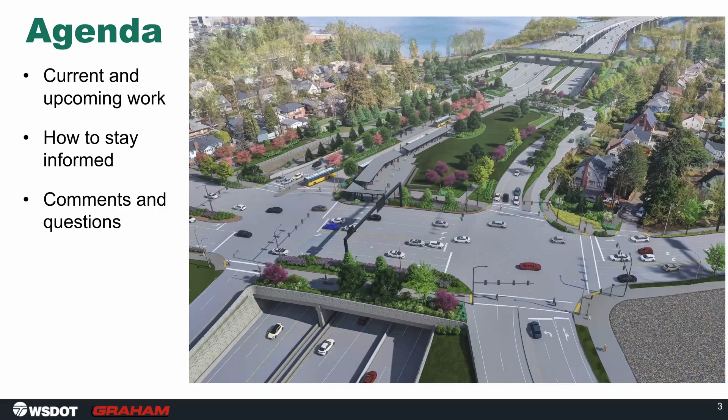So as many of you know, the Montlake Project is made up of three major components. One was the new eastbound bridge. The second being the Montlake Lid, which includes the HOV and bus lane improvements, and then the on and off ramp. And then we also have the bicycle and pedestrian bridge, which connects the north and south pathways.

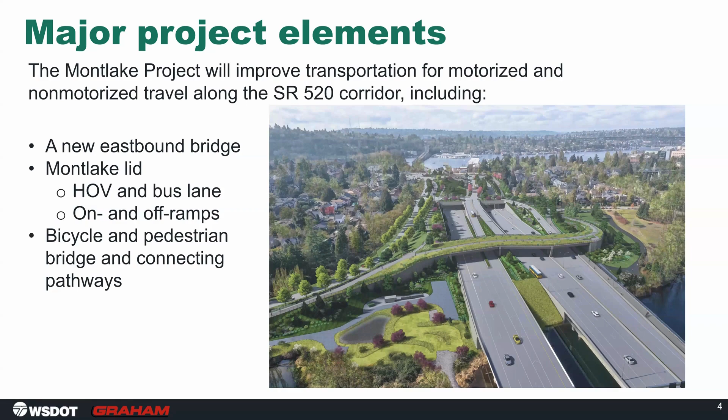So back on September 16th, we opened up the HOV ramp and the new HOV lanes across the lid structure. In the left-hand picture, you can see an image of what that HOV ramp looks like for those who have not had the pleasure of traveling on it yet. So that heads both east and west onto 520. Sorry, let me clarify that. It is for traffic heading west off of getting onto Montlake and Lake Washington, westbound 520, and then it gets you back onto eastbound 520.

In the right-hand photo, you can see an image of how that intersection works at the top of the ramp. So Ryan, if you can follow me around that to clarify with the pointer. When you're coming westbound on 520 and you get up onto the top of the lid structure, you can use the HOV ramp, which Ryan is highlighting there for 3+ riders or bus traffic will be using that. The other alternate route is for you to take the off ramp, which is the white line there, and that will both intersect at the stop sign intersection on the top of the Montlake Lid.

So HOV traffic can carry straight through that intersection into the transit center area and the Montlake Lid area. And then the white traffic, general purpose, can carry through that intersection to Lake Washington Boulevard, heading east or west on Lake Washington. Then for traffic moving on eastbound Lake Washington Boulevard, they can utilize the HOV lanes with 3+ passengers going eastbound on Lake Washington Boulevard and then turning onto the ramp. They can also utilize it coming from southbound Montlake across the lid and getting onto the ramp there as well.

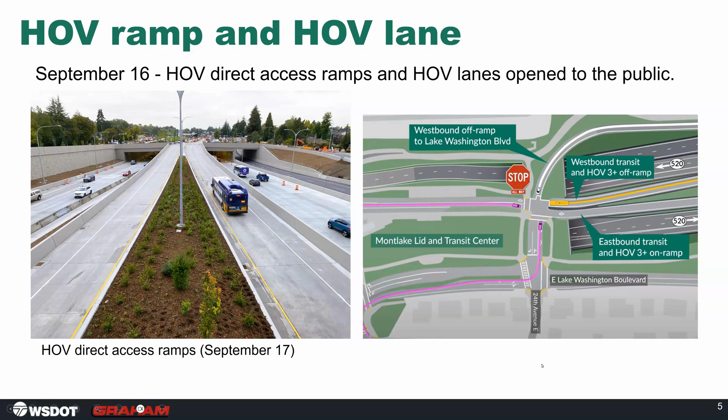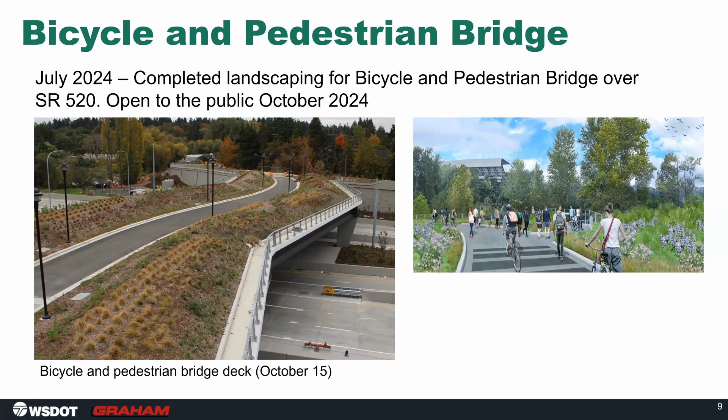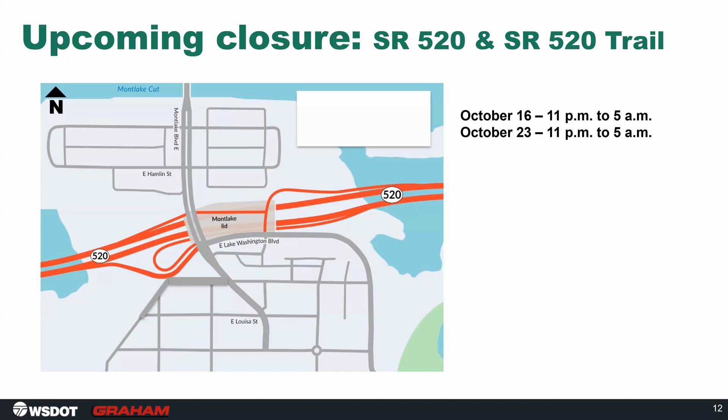So we're getting to the end of things and things are starting to open up. A lot of the work still to be done is systems testing and commissioning. October 16th and 23rd are the next upcoming commissioning closures, so you'll see a closure of 520 to complete testing underneath the lid structure, things like the fire suppression system, lighting, signage, and emergency gates, making sure everything operates correctly. Those overnight closures will occur to complete that activity.

Along with that, there are a few final nightly closures to complete testing and primarily striping on the roads.

For the next couple weeks, we'll have some Montlake Boulevard closures, northbound or southbound, or full closures at night, with single nights reopening during the day. That's to complete final striping on the roadway, we have to close it so nobody drives through the lines while we finish that piece of the roadway system.

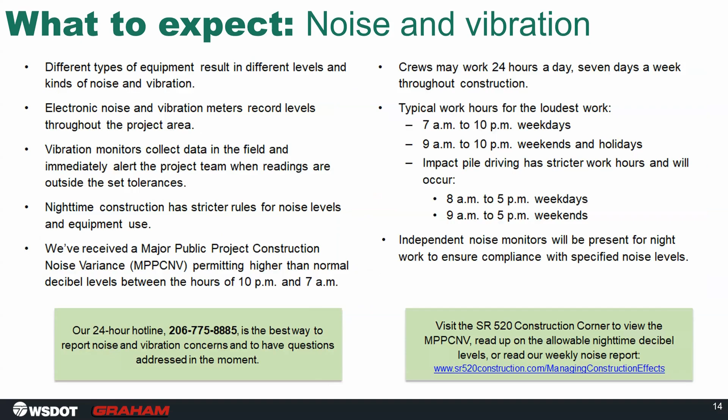Thanks for your question. If we can flip back to that calendar view, please, Ryan. We don't anticipate full weekend closures — we're actually working through with WSDOT the closures for the next couple months and trying to avoid any full weekend closures moving forward. What you will see are nightly closures of Montlake, Lake Washington, or 520 to complete things like striping or commissioning that I previously mentioned. So we don't anticipate many at all, if any, full weekend closures at this point.

Alex wants to know when will the plaza at the corner of East Roanoke Street and East Montlake Place be completed? Thanks for the question, Alex.

Along with a lot of the work, the plaza part will be done at the end of October. The plaza is actually just the corner peak. I don't know, Ryan, if we can scroll back to the overhead view of the project.

But that is just the corner of that property. The market property itself, where we have some staging going on with materials and a couple trailers currently located, will be turned back over to WSDOT in December. So until then, we will be occupying that space, and it'll just be the peak, the tip of that lot on the Roanoke Montlake corner that will be open.

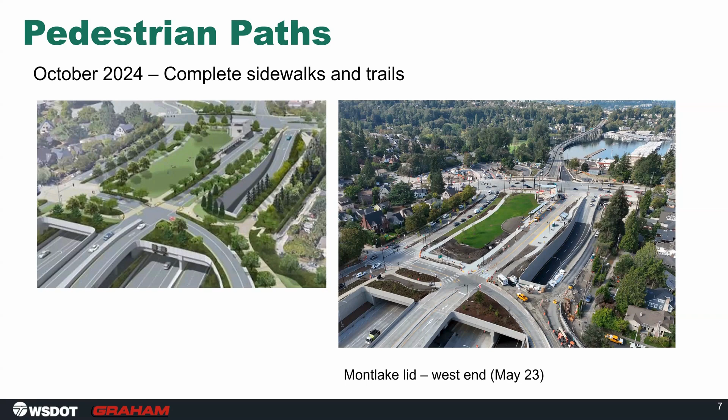Another question from Alex: Is the 520 closure in November intended to be weekend-long or just nightly? We were actually just working through those details, Alex. So we anticipate it will just be nightly.

Elias wants to know, will there be any more closures on the 520 bike pedestrian trail before all the pathway trails on the lid are completed? Brian can correct me if I'm wrong, but I think we will need one more closure to do the final tie-in. Right now we have a temporary path paved in there. We may need a short closure to do the final tie-in of that path down at the East Park Drive East location. But that work will be wrapping up and closures will be stopping as well.

When will the pedestrian bridge be open? Like I mentioned before, that is all waiting on the completion of those paths on the north side. We anticipate that to be done at the end of the month as well.

Another question from Alex: In previous monthly updates, landscaping and the opening of the lid was intended to be completed months earlier than it actually is now. What was the biggest driver of delays beyond just rewording when those would be completed?

Sure, I can take this question, if you would like. So I'm going to give several answers. It's a big, complex project.

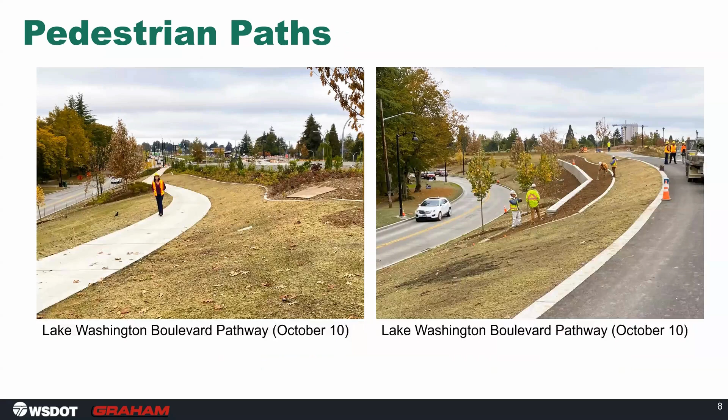Also, the planting has been taking longer than expected. There's a number of reasons for that. One is because the project has been delayed, as you all know, by more than a year because of COVID, the Teamsters strike, and other issues. Plants are not an off-the-shelf item; they are cared for in nurseries, and the inventory of plants changes from year to year. So our landscaping contractor is taking quite a bit longer to plant, physically put plants in the ground, as they sort through that availability and when they can receive shipments, etc.

If I think about the sidewalks and delays there, a lot of it may not be clear to the public, but there are special terms on this contract regarding having a water treatment facility available, because specific areas within the contract limits had contaminated soils before the project started. So Graham had to have a water treatment system, which we housed just north of the PLB, until specific areas of soil were covered with topsoil. The area we were just talking about on the Bill Dawson Trail specifically had to be covered with topsoil before we could remove the water treatment plant north of the pedestrian land bridge.

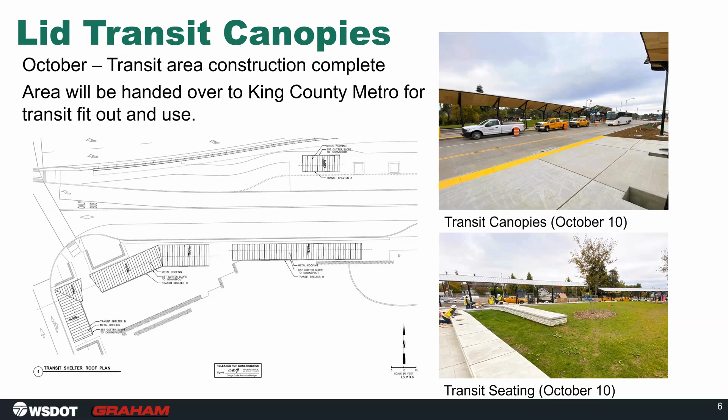Thank you. Debbie wants to know if it is possible to use black wire fencing around the old hop-in property after it's done being used for staging until it's sold, to fit in with the black signposts and lampposts. Thanks for your question, Debbie. It is in our contract to pave and fence that lot before we leave it at the end of December. I cannot comment off the top of my head what that fencing spec is, whether it's black wire fencing or not, but it will be a fenced property when we leave it at the end of December.

Steve wants to know, can you comment on what landscaping is left to complete on the west side of Montlake Boulevard, as well as the traffic island near Hamlin Street? Right now, it's a random splattering of new plants and a lot of weeds.